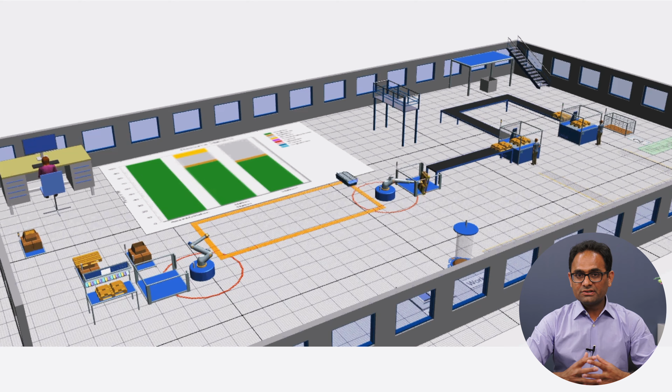Manufacturing system simulation is a proven, powerful tool for designing and evaluating a manufacturing system, as it is a low cost, low risk tool that enables us to perform quick analysis and get meaningful insights about the performance of the manufacturing system.

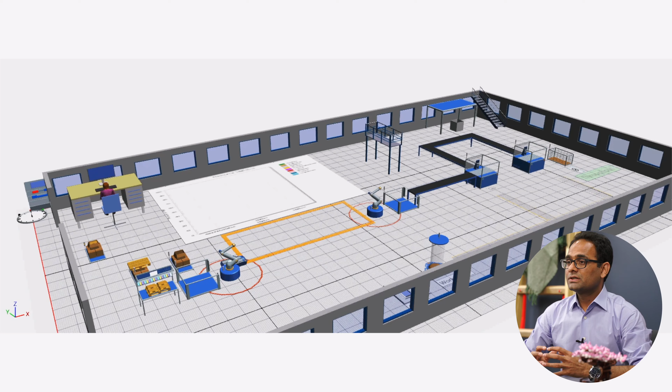Shifting from a dedicated or flexible manufacturing system to a reconfigurable manufacturing system requires a significant amount of time, money and effort. Therefore, it is very important in the beginning to evaluate that the potential reconfigurable solution will be able to meet organizational objectives. Simulation, more specifically discrete event simulation, offers us this opportunity to evaluate several reconfigurable alternative solutions beforehand and to see whether those solutions are able to meet organizational objectives or not.

Also, simulation can help to perform reconfigurability analysis and help to determine the minimum number of machines that are required to fulfill the demand. In the 4-step Recon method, simulation is one of the important tools that we can use throughout. For example, in the first step, a less complex, quick and dirty simulation model can be used as a communication tool to showcase the reconfigurability potential of a particular system.

In the second step, simulation can be used to perform detailed analysis of the manufacturing system and to develop alternative reconfigurability options. And finally, a detailed simulation model of the potential reconfigurable solution can be built and tested before starting the actual implementation.

Several simulation software are available in the market to model and simulate manufacturing system processes. Some of them are Tecnomatix Plant Simulation, AnyLogic, Arena, Simio and FlexSim, and there are many others. In Recon project, we worked with several industries both in Denmark and Sweden to test out several Recon tools including simulation. From now onward, I will discuss 2 company cases that will help us to understand how simulation can be used in the design and analysis of a reconfigurable manufacturing system.

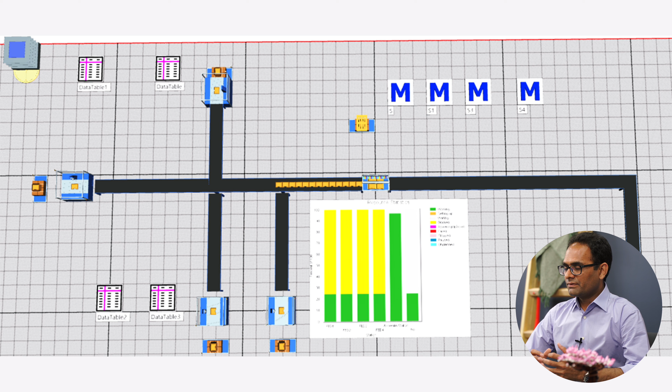Here in the figure, you can see the simulation model of the current production setup. There are 4 feeding stations which are feeding 4 different types of variants to the assembly station through a conveyor system. The assembly station will glue all the 4 variants together and send them to the final process through another conveyor system. The throughput of the current production system is 2000 units per day.

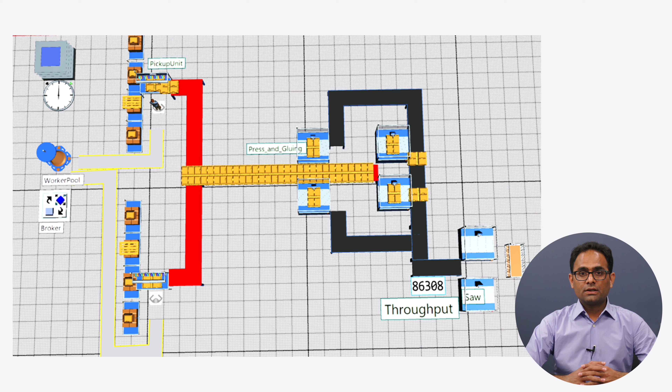The simulation model of the proposed production system is like this. There are 2 feeding stations and each feeding station is capable of feeding 4 different types of variants at the same time through a conveyor system to any one of the 4 available gluing stations. And finally, in the end, we have 2 workstations for the final process. The throughput of the proposed production system is 8000 units per day.

This new proposed solution will reduce lead time substantially, as we can simultaneously process batches with longer and shorter lead times. The proposed production system covers less physical space, and there is a further scalability option for the future if required. In this case, the simulation has given us a very clear understanding of the proposed production setup in comparison to the current production setup.

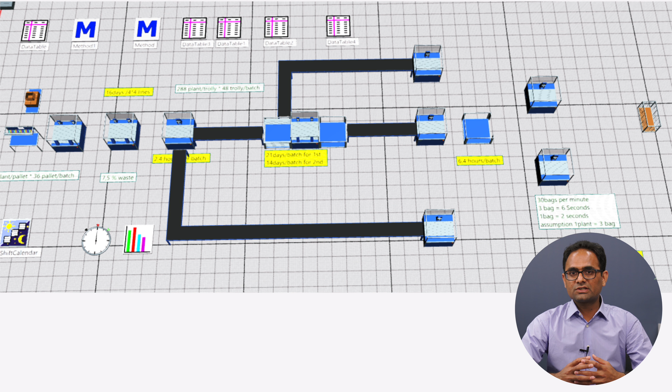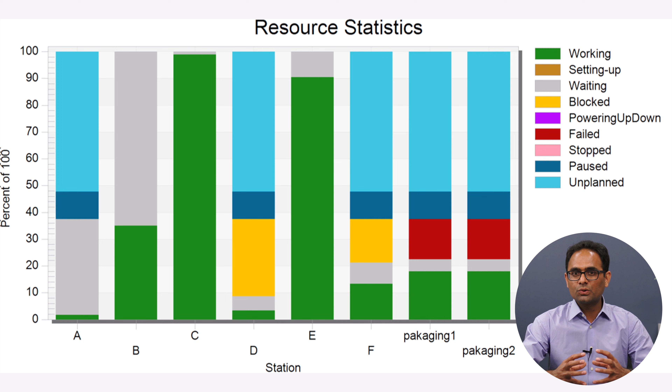Case 2 is about a company from Sweden. A simulation study was conducted to explore the scalability options for the case company and to increase the system throughput. The detailed simulation model of the current production system was built and analyzed. As you can see from the resource statistics graph, the packaging process in the current production setup is the bottleneck, and also process F is limiting the throughput of the system. It was observed that by adding 2 more packaging machines and 1 F workstation into the current production system, a 25% increase in the total throughput can be achieved in a year.

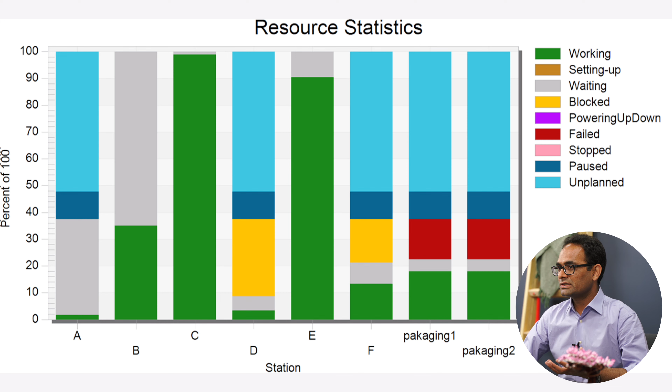Similarly, through simulation model experimentations, several other options were explored. For example, increasing the number of shifts at particular workstations, also decreasing the number of shifts on certain other workstations, and seeing how it is going to impact the throughput of the system.

In conclusion, simulation is an important tool in the design of reconfigurable manufacturing systems. It not only helps us to test and validate potential reconfigurable solutions, but also helps us to generate different alternative reconfigurable solutions. Simulation is also an important communication tool that may help us to visualize the future manufacturing system with different reconfiguration options.